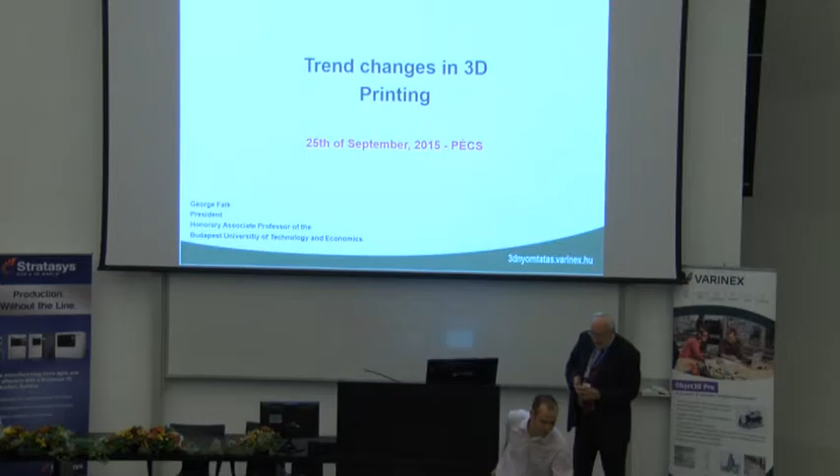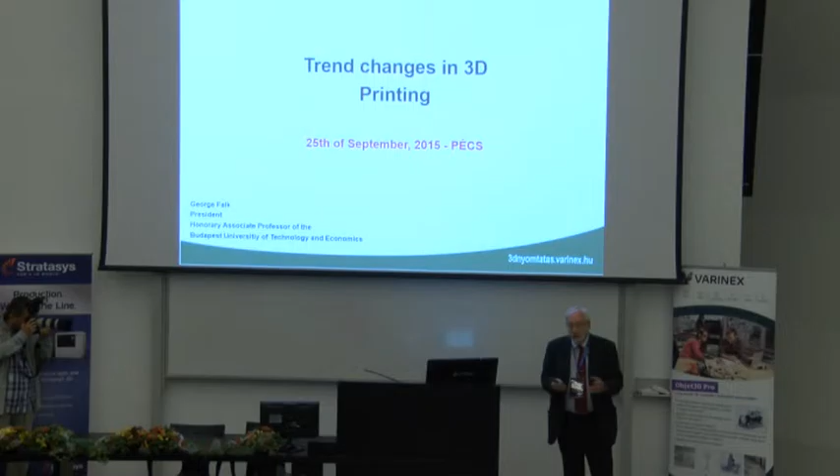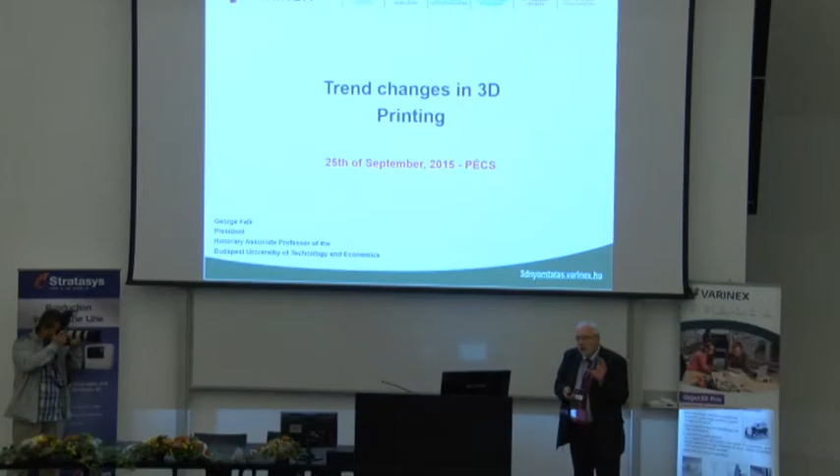It's not an easy topic, and if you go out you can see all the printers, and we can say that there are printers which are mainly produced for home usage, and there is another world which is produced for professional industrial application. I try to touch all the things, and there is one motivation or one engine which drives the whole thing, and this is the innovation. So I try to

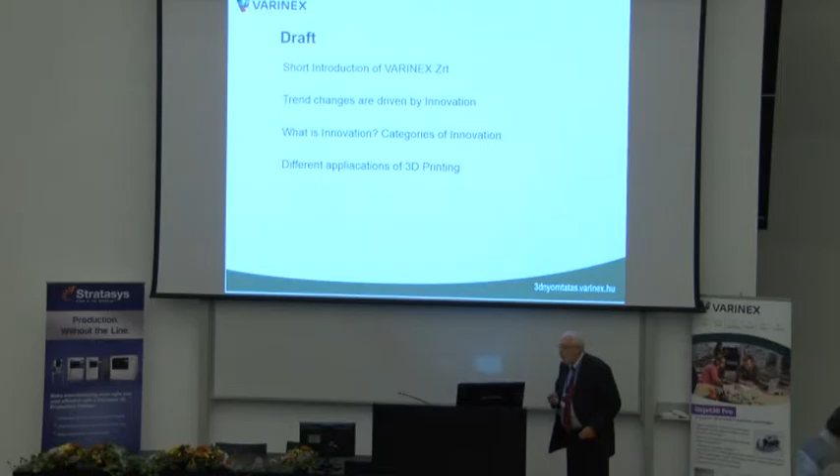talk about some points of this, and I think we can skip the Varinex introduction, just to mention on the left side, my friend George Volonch, and we founded the company 24 years ago, so next year we will celebrate a nice event. Some milestones: it's a fact, no question about it, that the first rapid prototyping service was established by Varinex exactly 17 years ago, and I'm still happy to do that.

Because, you know, at the beginning everybody said, George, you will be bankrupt, nobody wants to have any model created by layer, but today it is a little bit different. We have 5 different machines, 4 different technologies, and I hope very soon we will have a new machine which can create 3D metal models as well.

So this is not very important, but everybody talks about the importance of innovation, and I did a little research and I got some nice sentences, and I don't agree with them, but I like to mention some of them. Innovation guarantees the freedom of the mentality. So just remember. But I think innovation is a much more important thing, and this year we celebrate the 15th year of the Innovation Prize we got.

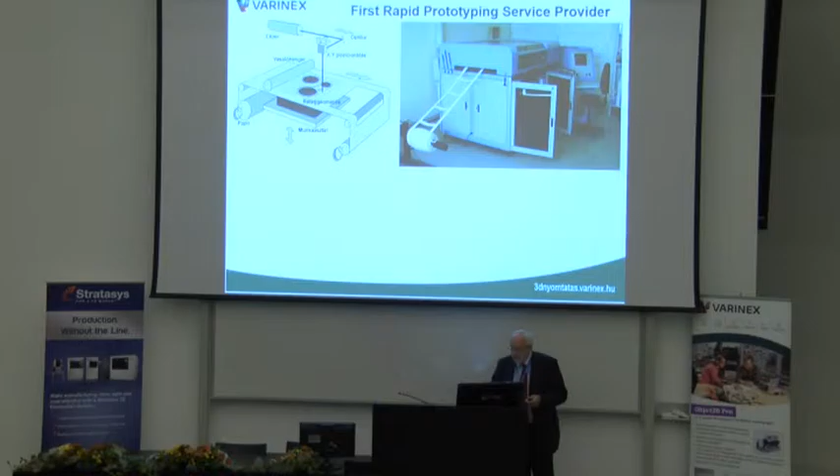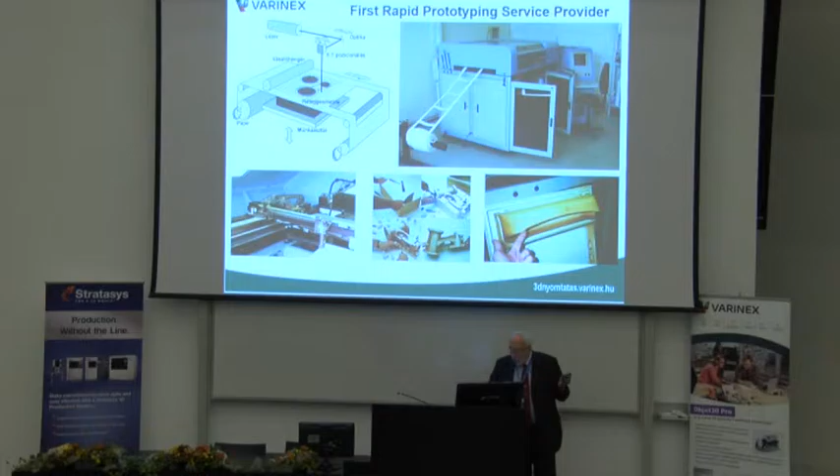So this was our first machine. It was about 1 ton, and it worked with paper, and layer by layer the paper was laminated by glue, and the hot roller you can see activated the glue, and the laser was cutting the actual contour of the given cross section. So it is really a fantastic, nice machine, still working at the Technical University and Economics in Budapest, but it's a little bit old-fashioned and a little bit slow. But anyway, it was really a good start, and we still love it.

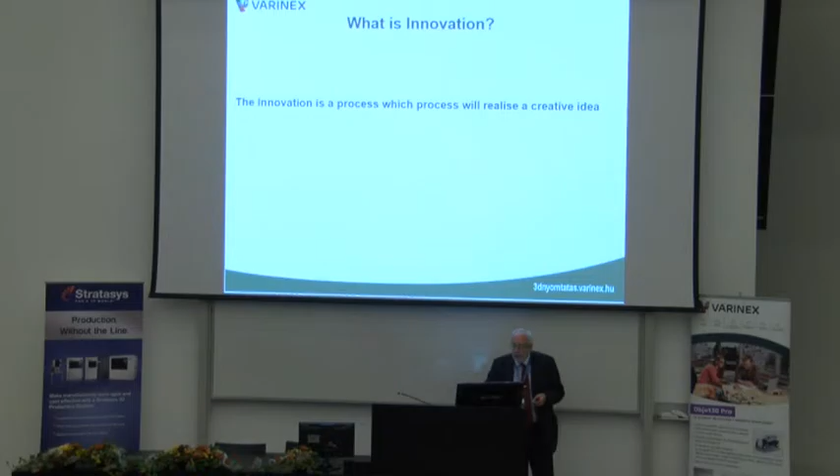Why am I mentioning innovation? Because innovation is a key moment in this whole changing of the world, and there are several big categories, but probably the most important, and maybe it's very basic, but you have to remember that innovation is a process which will realize a creative idea. So you have to have a creative idea. If you don't have that, you are lost. And of course, there are several different categories.

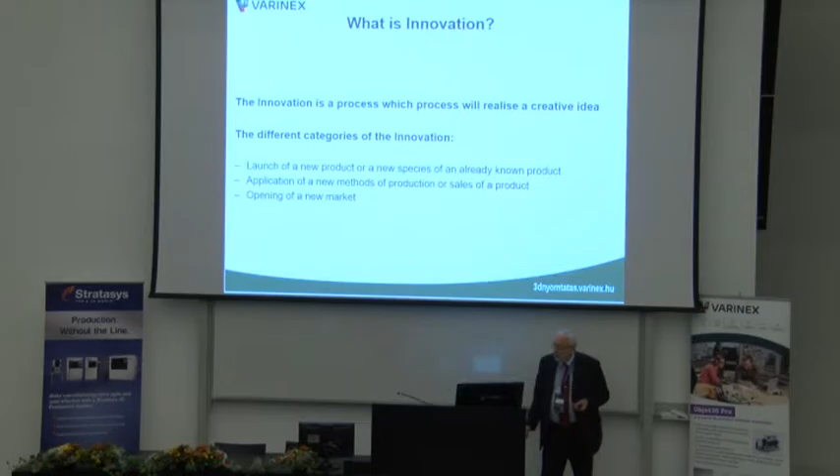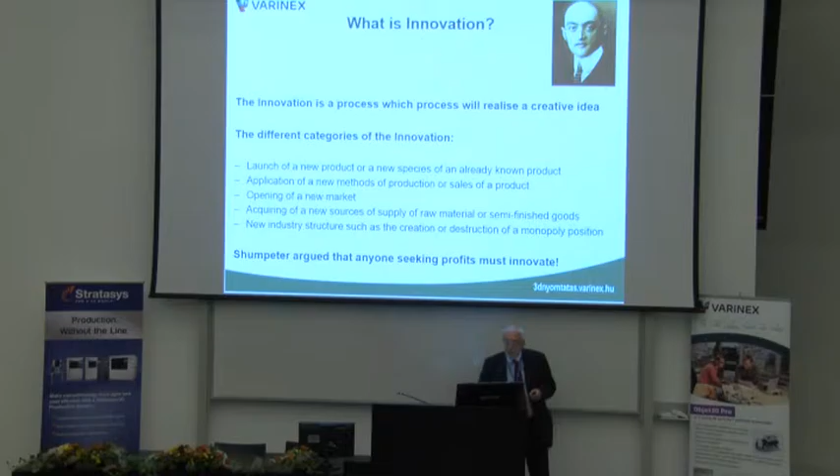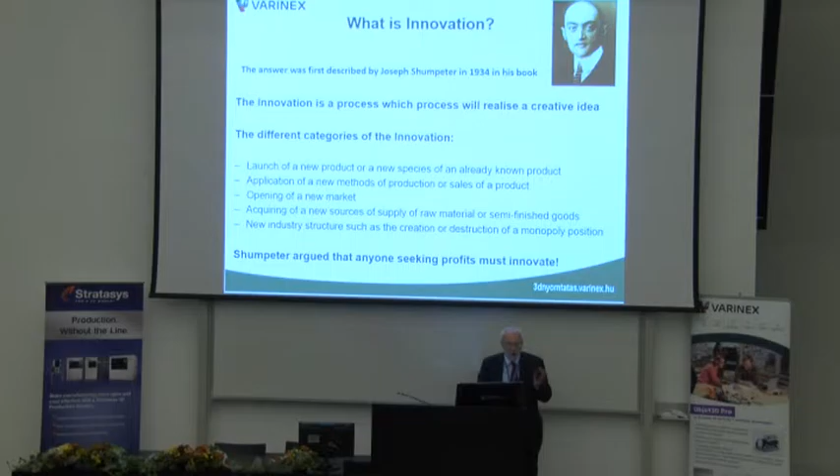Main point, I think, for today is that if you want to have a new product, you need innovation, and which is very, very important, if somebody wants to have profit, it's a must to do innovation. And this is the guy, actually, Joseph Schumpeter, and he wrote this in 1934. So it was not yesterday, and in Hungary there is also an innovation law, and there are several things, but these are the basic things which you have to remember.

Why 3D printing? This is an obvious question. There is a company, you will see the name in a minute, who collected the most important ideas and most important topics in the future, and there are altogether 12. I think somebody mentioned earlier, for example, cloud technology. It's an important thing because everybody will use the cloud instead of a computer. But which is very good for me, and it touched my heart: 3D printing is among the 12 most important future elements.

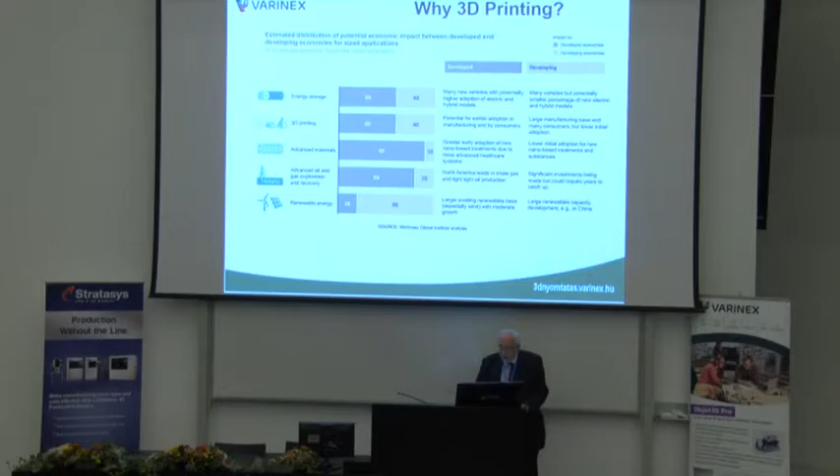In my personal opinion, it's not in the ninth place, it should be a little bit earlier, but anyway, McKinsey says that the 12 most important include 3D printing. In 3D printing activity, there are two main fields.

One field is the so-called personal printers, the small printers, which you can buy at a cheap price, and you can go home and print what you want. But the point is that, I really have to be very careful not to say anything wrong, these are not professional, I mean not industrial printers. You can print several things,

and I think it is very, very important, because children can have a very good toy to learn the layer-by-layer approach of making something. And I think it is important because if somebody really wants to understand 3D printing, probably the most difficult point is that an object can be printed layer by layer.

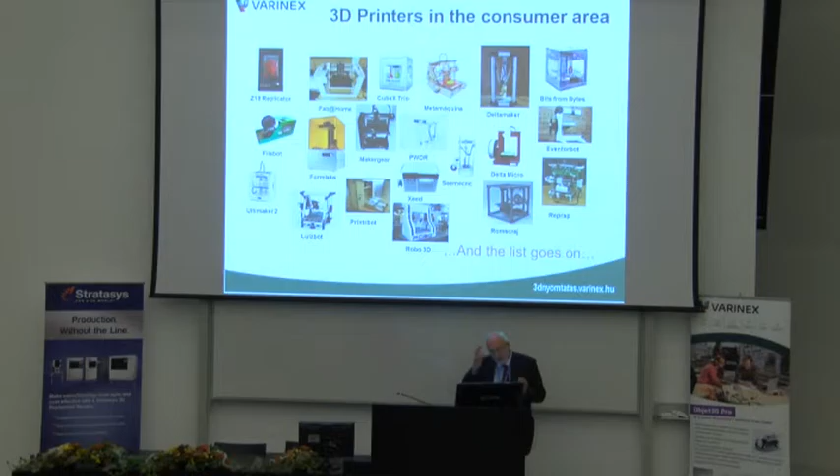All the engineers my age, let's say around 40, 50, have learned how to take off the unnecessary material, let's say by CNC milling or whatever, but to create something layer by layer, it's a completely different story.

Still, there are some social financing solutions like Kickstarter. Maybe you cannot read it, but here you can promise that you will create a new printer and it will be the best in the world, like this one. And if you do this marketing very well, you can collect $3 million.

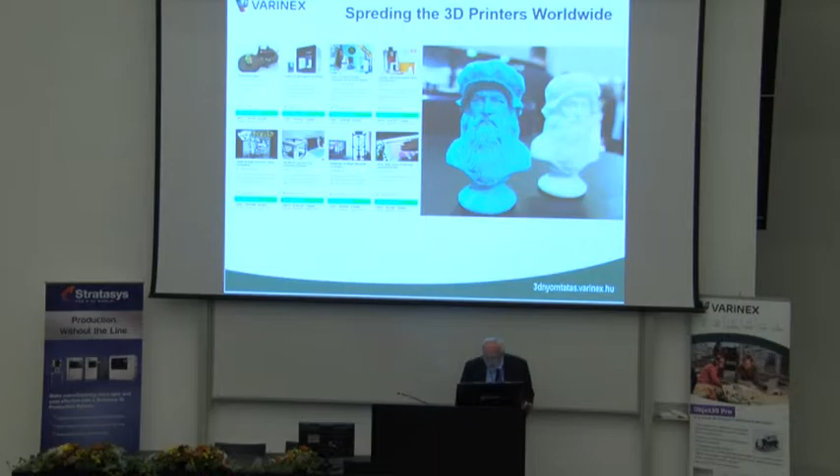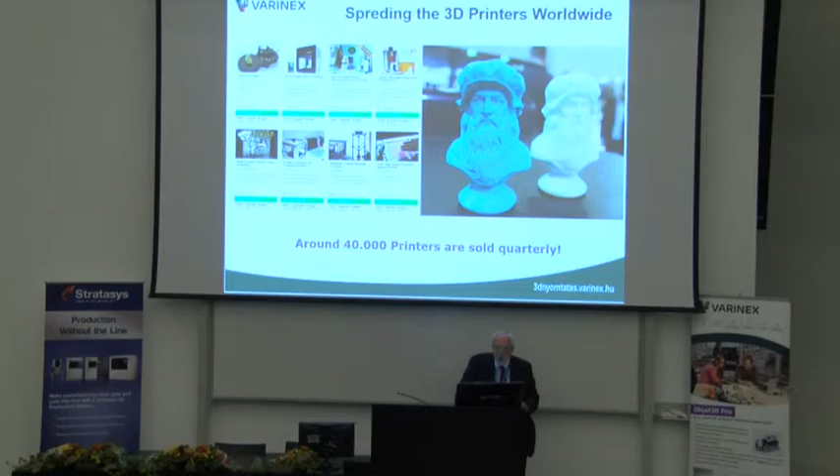But still, on the right side, you can see, even the projector can show it, that with this layer-by-layer approach, the surface quality and the total quality of a model can sometimes be a question. But still, we have to think about it, because in one quarter, 3 months, about 40,000 printers are sold worldwide. So we cannot say that we need not think about it. But thank God, for the professionals or the industrial guys, these are not the topic we have to really concentrate on.

Why is 3D printing important? First of all, as I mentioned, the innovation. What can a 3D printer innovate, or what can it change? The first issue is communication. Today, as you can see, I'm

doing a presentation with PowerPoint, but during a real technical meeting in a company like Bosch or any big one, they don't do it anymore. They print the model they developed yesterday, put it on the table, and all the engineers sit next to the table talking about the different features and benefits, and they don't use any paper 2D drawings or PowerPoint. They print a model, and the communication is much better. The productivity of the communication is much better.

This is also a sample, actually two samples, an engine block, a very, very complicated part. If you really want to talk about it, it is much better if you have it in your hand. The left side is a top secret picture, so close your eyes, because this is an Audi engine in Győr, but they really use it daily to communicate.

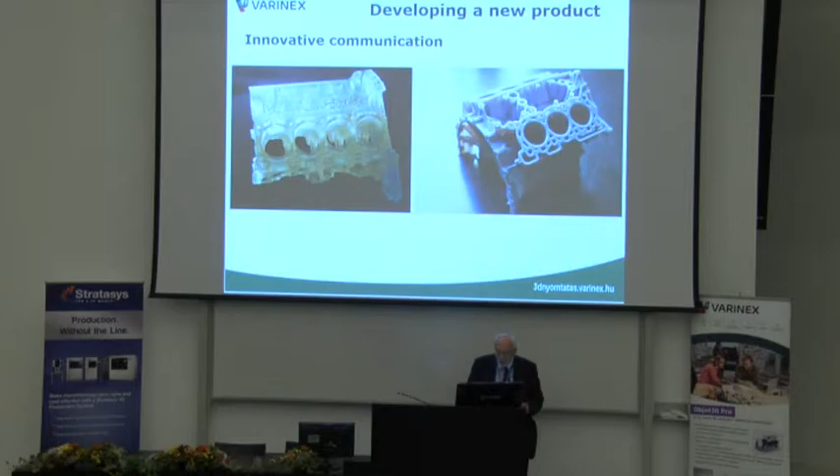You know, at Audi in Győr, they do the assembly of the whole engine, and one assembly line is about 150 meters. So it's a very complicated mechanical engineering issue, and there are a lot of questions about where to change the position of the engine block, so it is much easier to touch it, even if it's not a 1-to-1 scale model but, let's say, a half-size model. It is much easier to design a 150 meter long assembly line using this.

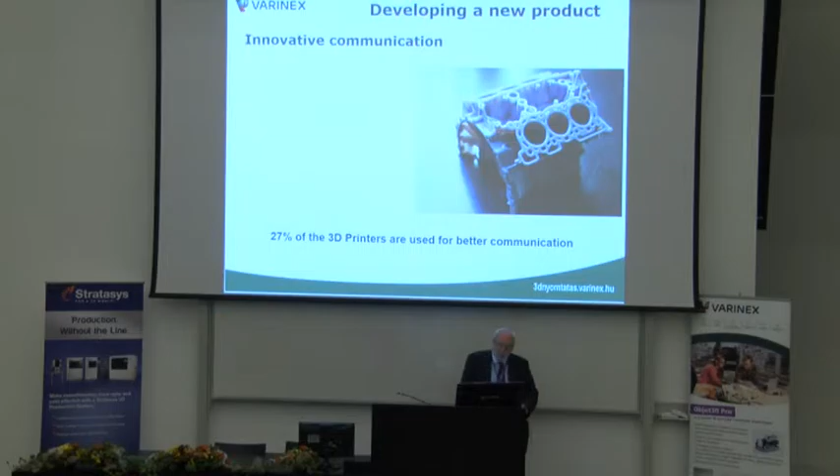About 20%, 27% of 3D printers are used for better communication, which is a really important number. I just wanted to bring another sample like this. This is a part which must be injection molded. I don't know who knows what injection molding is, but it would be a real challenge to design the injection molding tool. And to talk about it, it's much easier if I can take the part which the injection mold tool will produce. I can hold it in my hand before I start making the tool.

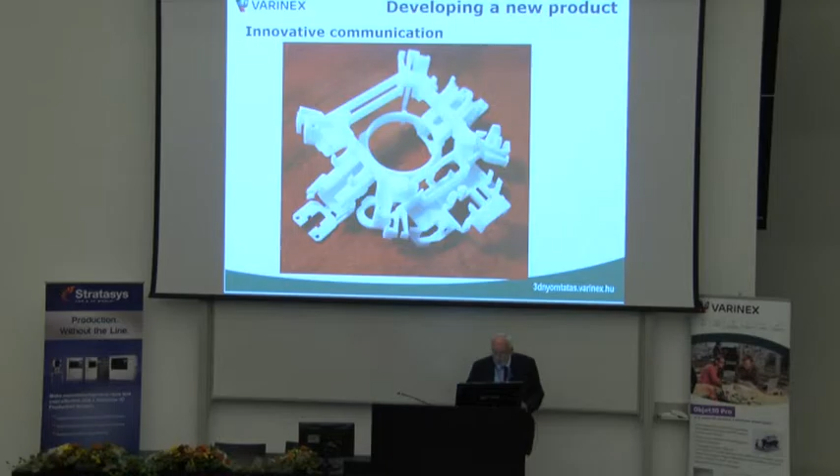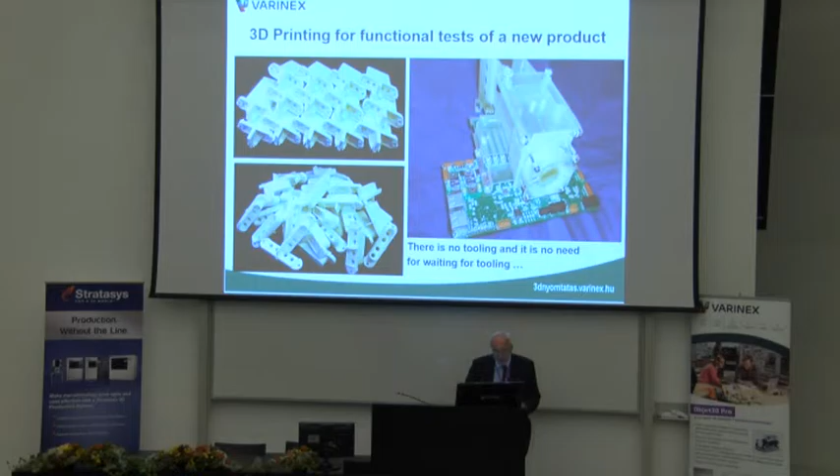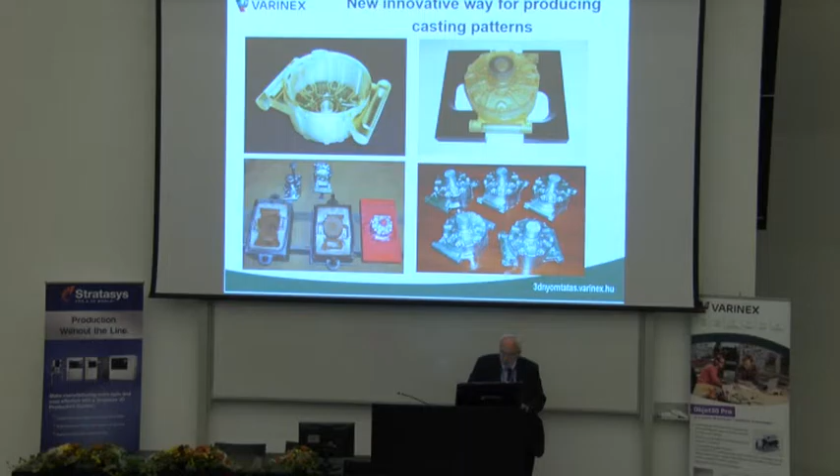Of course, there are several application areas where you can use 3D printed models. This is a short sample of how we can create very fast sand casting patterns, core boxes, and all kinds of things.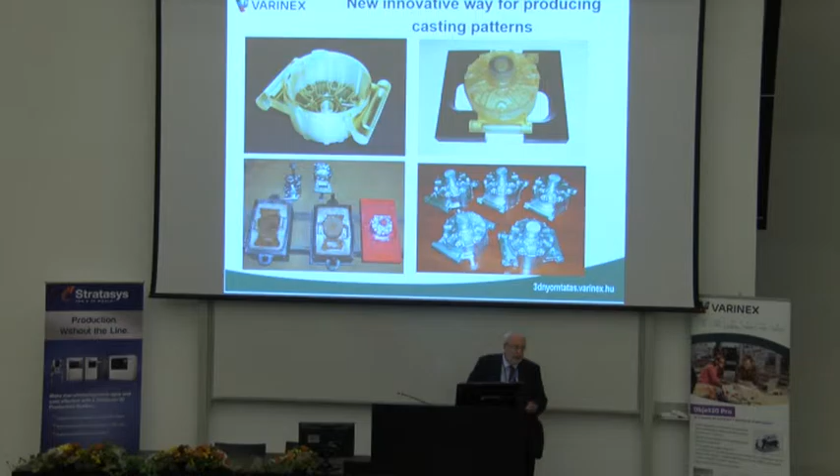When an aluminum cast prototype is needed, earlier it took about 2.5 months. This time can be reduced to about 1 or 2 weeks maximum. And of course, the big companies using these prototypes really appreciate if we can reduce the time to such a high level.

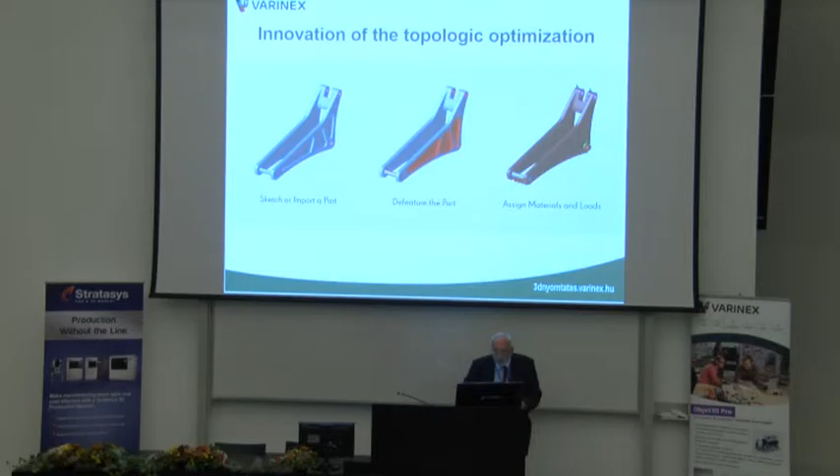This is also an interesting point. I saw one of the colleagues will present about this, but this is the so-called topological optimization. The criteria of the optimization is to reduce the weight of the given model or part. This is how it is done. You see from this shape, the left side shape, you can find such a structured model.

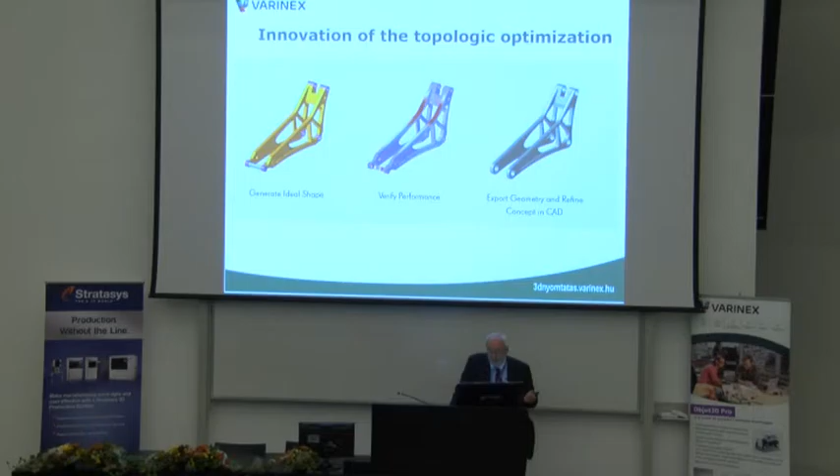The goal is to reduce the weight, and it is really important. But if you do it, you get this model, and then comes the next question: how is it possible to make it? For example, doing it by investment casting technology would be very complicated. Here's another sample: this was the conventional design of a bracket, and this is the right side, the topologically optimized version, but it is simply impossible to make it with traditional methods.

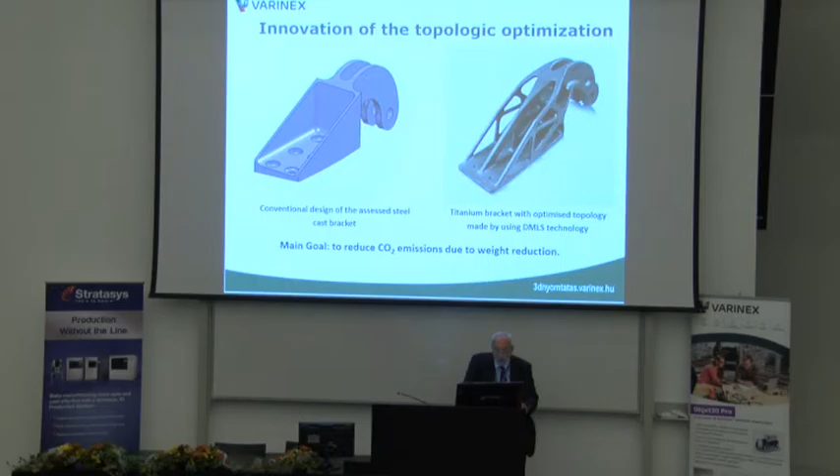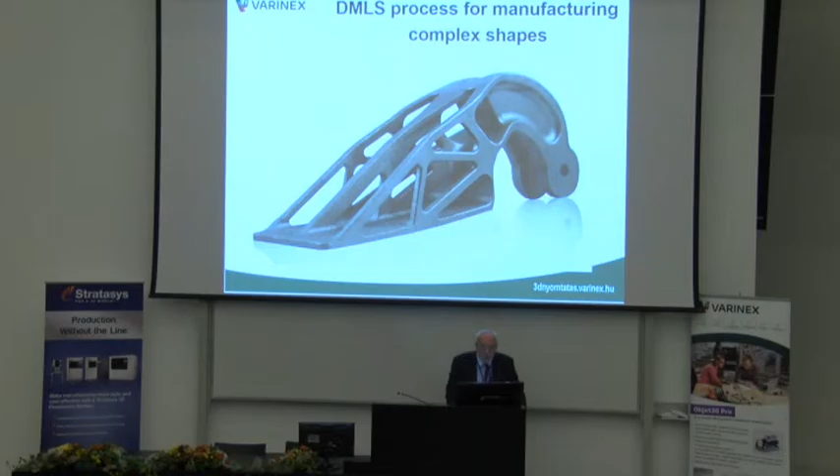But if we have the right technology, direct metal laser sintering, then you can make it layer by layer, whether it's steel or titanium, it's not a problem. This is the shape again. It's really nice from a mechanical engineering point of view, but it is simply impossible to produce it in a productive way using traditional technologies.

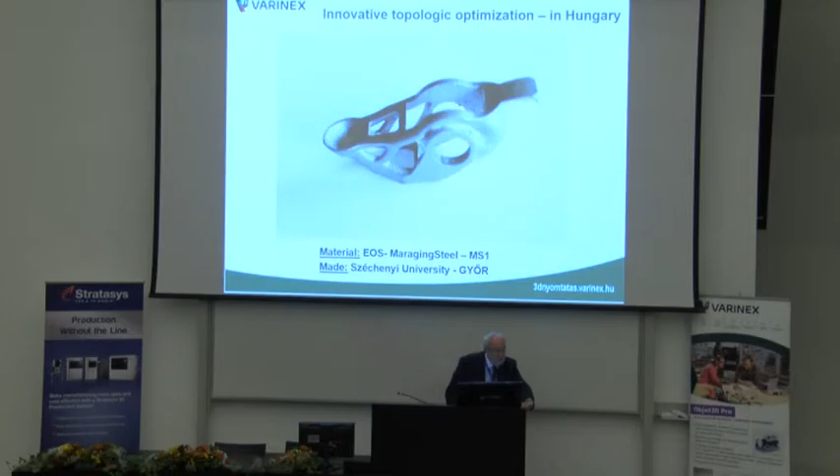This is the first Hungarian sample we did together in Győr. You can imagine it's also a part of the Audi engine, so you know who is behind it. It's interesting because we developed some ideas, and I'll show you. This is a kind of working envelope where you can put together 65 pieces. It means that in one shot you can do 65 pieces of such a complex geometry, which otherwise would be very complicated. It took about 20 hours.

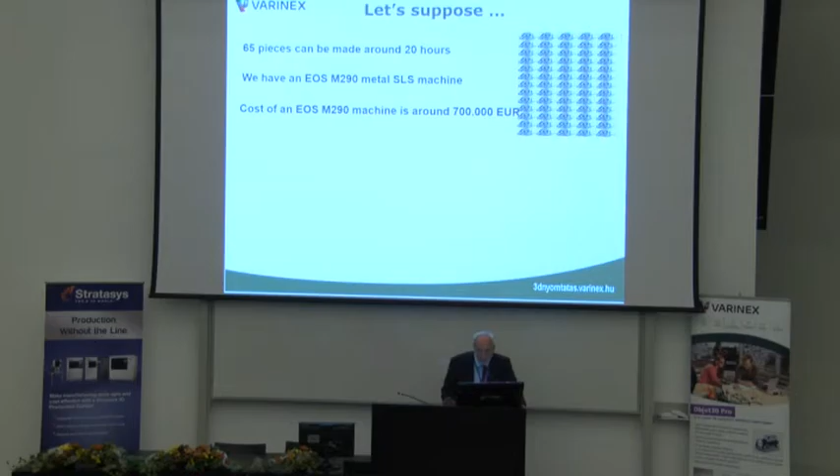Everybody said, oh, 20 hours, that's long. But I think it's not so long, because you don't need to go to investment casting. You can go directly, and from the 3D CAD file you can print exactly what you need. Supposing you have a machine, an EOS machine, and you can print 65 pieces in 20 hours—here's the bad news—such a machine costs 700,000 euros, so take your pocket money, you have to work on it.

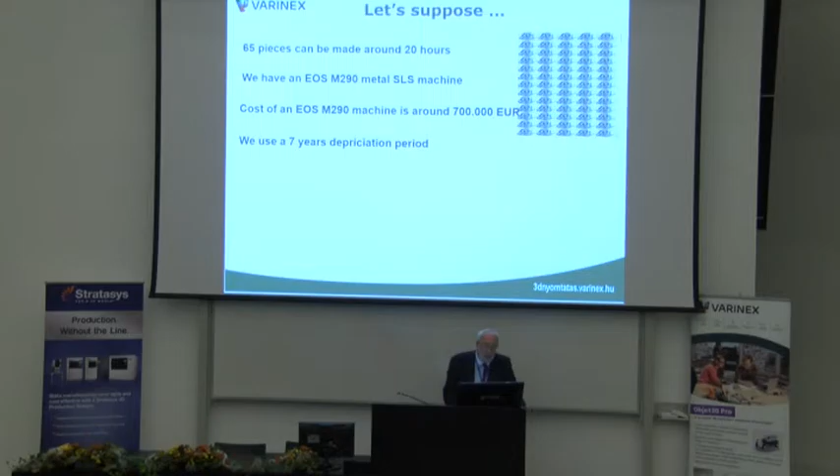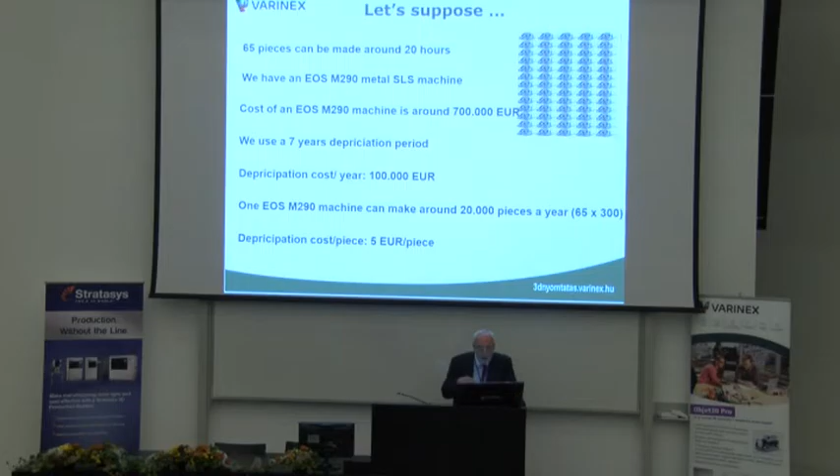But I hope you will understand, if there is a depreciation period of 7 years, then it costs 100,000 euros a year. And if you multiply everything, you can make 20,000 pieces a year. That means the depreciation, the amortization cost per piece, is about 5 euros. Such a small amount that everybody starts thinking about how it is possible to collect the 700,000 euros to start this whole thing.

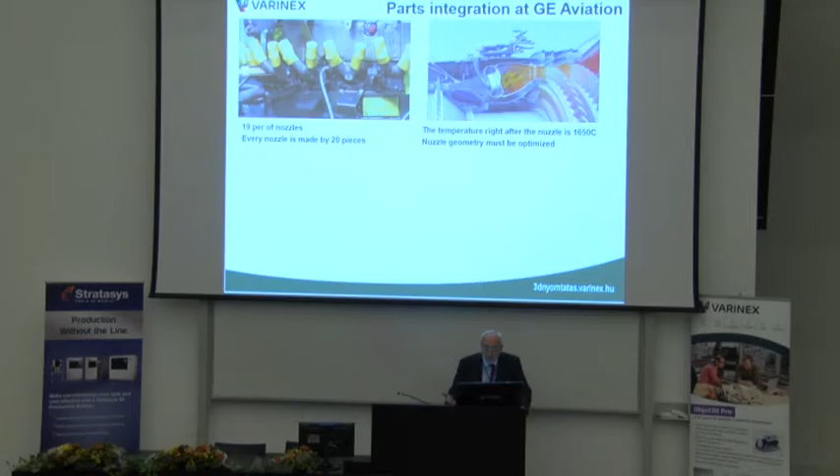Okay, so there is a very nice story, and this is what will change the whole approach of 3D printing. At GE Aviation in the United States, they create gas turbines, and there are some nozzles, around 19 pair nozzles. These nozzles take care of the fuel, and the fuel must go into the gas turbine, and the first area is the hottest area, at 1,650 degrees Celsius. So a turbine blade must be a very complicated engineering topic.

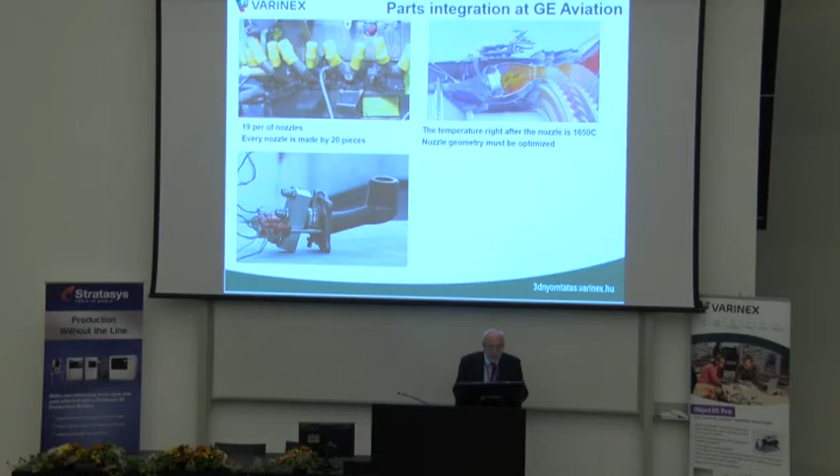But the main topic here is to create the nozzle. Earlier, GE made the nozzle such that 20 different pieces were made with traditional methods, then assembled and welded together—it was a disaster. Now they are down to one piece, laser sintered in one piece, and the productivity and quality are beyond question.

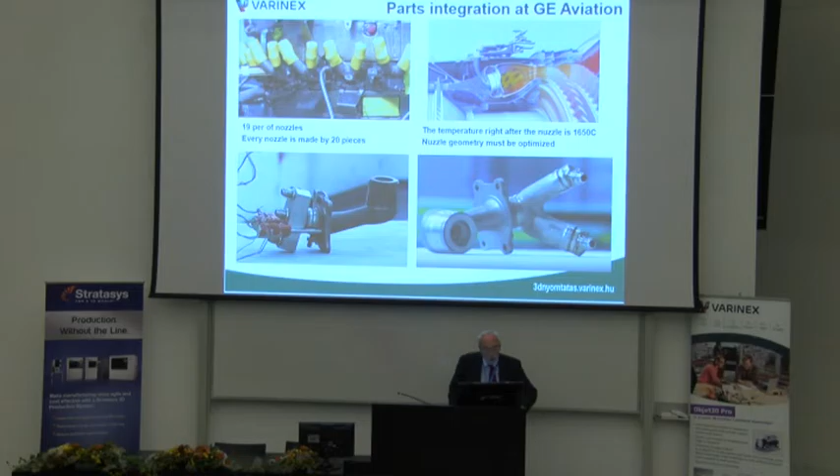So GE in the US purchased some machines—80 machines, not 18, not 8, 80. And remember, one machine costs about 700,000 euros, so it was a nice investment. But the total cost of the development was 3 to 5 billion US dollars, because they really wanted to create these nozzles and turbine blades in a completely different way.

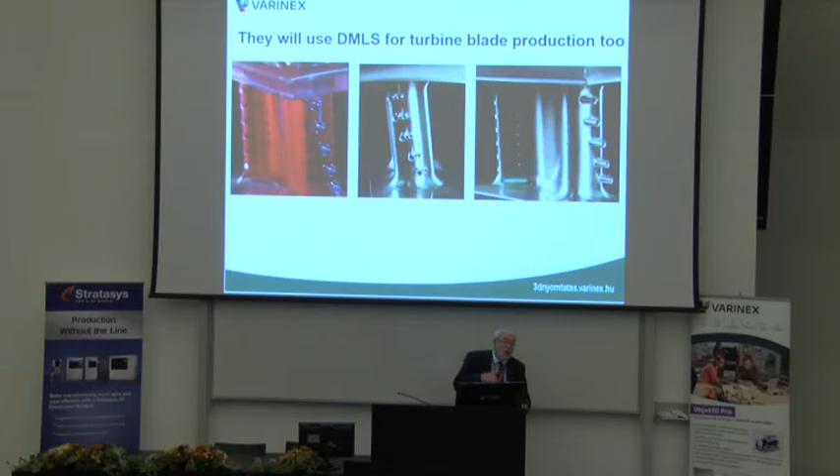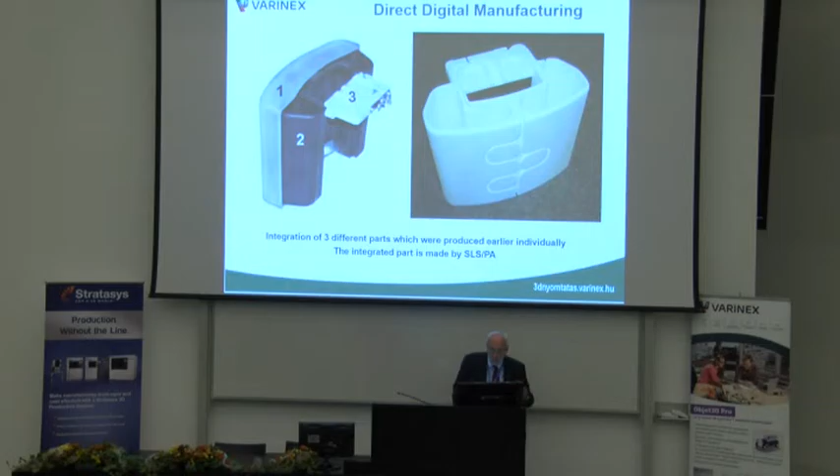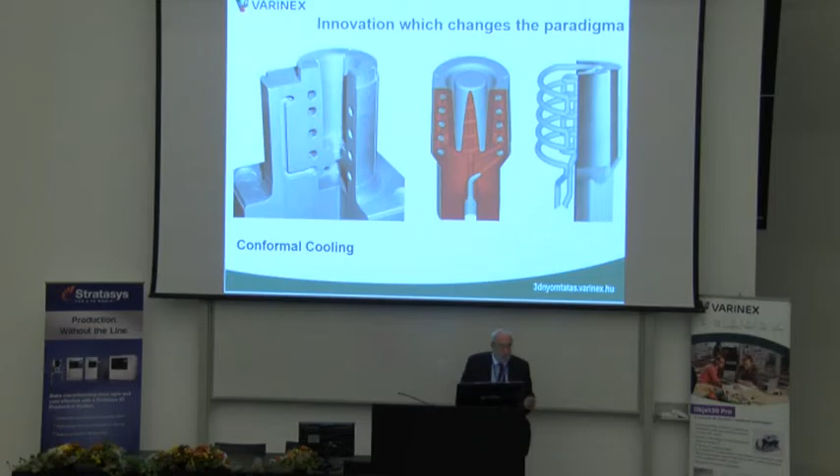So they will develop new materials which can be laser sintered in the machine. They do this with the blade as well. Inside there are curvy tubes, curvy channels I would say - sorry, I'll finish in a second, but this is so nice - it means they can cool the blade inside, and this is a very important point. There are several other benefits of direct digital manufacturing, which is also the name of 3D printing. You can integrate parts which were earlier injection molded separately, and this is also very important. The conformal cooling means you can create spiral holes, which is impossible to make otherwise because there is no such drill. So this is really an important point.